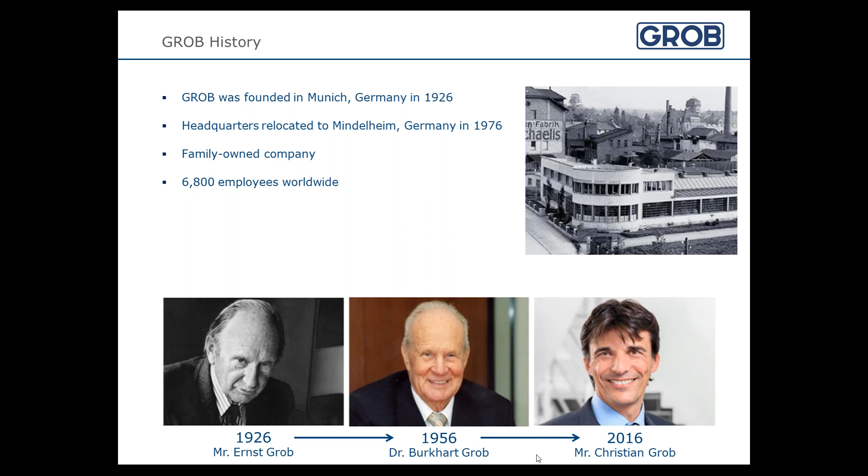Worldwide, as a company, we have 6,800 employees, and Mr. Christian GROB is now the leader of our company.

The GROB Group has 5 production plants and 15 sales and service plants, or branches. In North America, we have Bluffton, Ohio, where we are currently. We have our apprenticeship program here in our building. We have in all of the manufacturing plants everything from sales all the way through the end installation and service of the machines. Our company headquarters is in Mindelheim, Germany, that is in Bavaria, about an hour to the west of Munich.

We also have the second plant that was created in the GROB Group, Sao Paulo, Brazil. We currently also have a China Dalian plant and a plant in Italy, along with several worldwide sales and service offices. This is an overview of our company headquarters in Mindelheim, Germany.

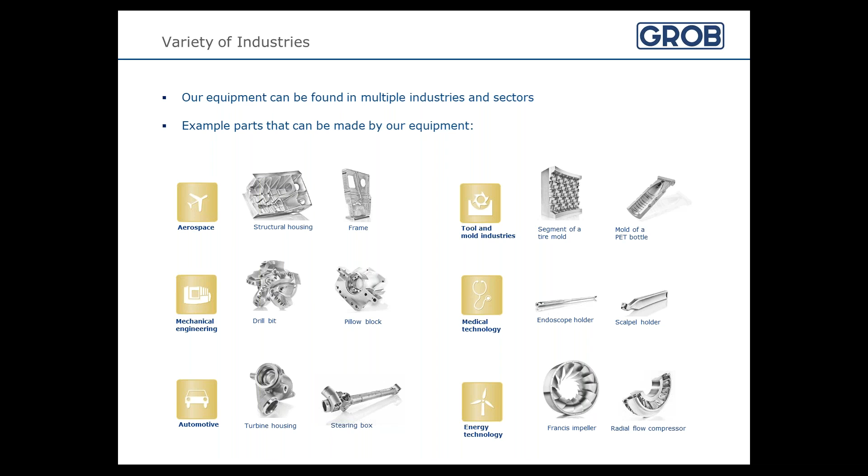So some of the cool things on this sheet, if you look under the medical technology section, we worked with and sell machines to a company out of Indiana that makes some very interesting medical tools. They also make replacement joints. So if you break a hip, we can cut you a new femur out of titanium on a GROB machine. A lot of things you wouldn't naturally think of.

It has 5-axis capacity, so it's able to make some very complicated cuts. It can orient the part in many fashions in which a normal machine would not be able to. A machine like that is going to be put in place at a customer site, and it's going to cut the same part every day, 24 hours a day, until it's completely worn out or they discontinue that product line.

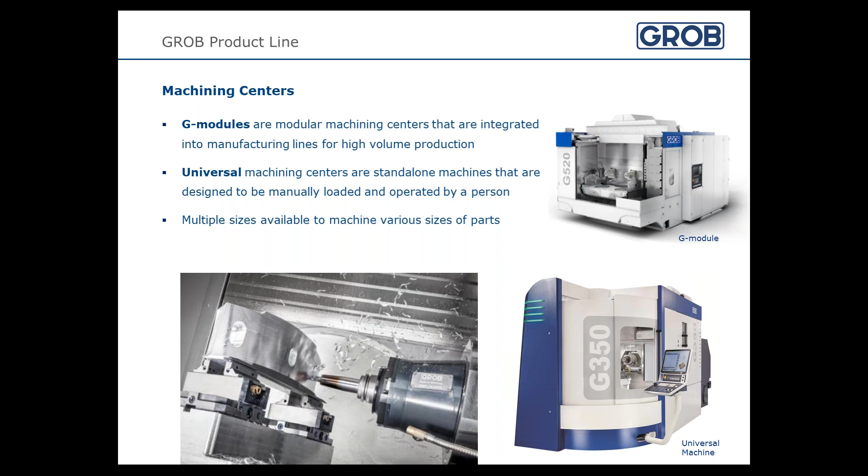That interacts with the spindle of the machine, so it has a very rapid tool change process. Then the motorized spindle is the part that actually clamps onto that tool, spins it sometimes up to 18,000 RPMs for certain materials, and is doing the work of cutting the part.

So the spindle is contained in the cross slide assembly, we would call it. It moves about 3 axes just in that position. The spindle comes in and out of its housing and then moves left to right on that axis. And then the last part is the tilting rotary table. This is where the part is affixed. That can spin about 2 rotary axes and then vertically on the y-axis.

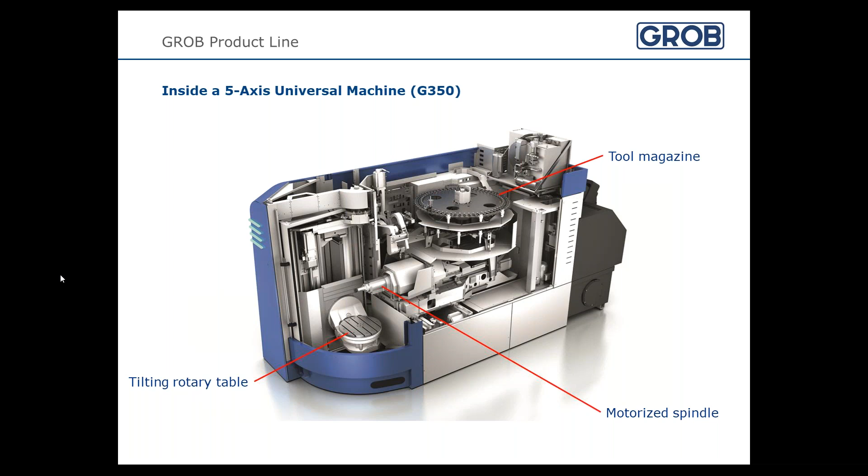There's some very cool videos on our GROB channel on YouTube that would give you a better grasp of how these machines operate. I would highly encourage you to look at that. We've tried to show that through the webinar, but the latency is a little slow. But if you have free time, I would strongly recommend that.

Some of the other items we can provide a customer with would be assembly systems. An assembly line is where we're going to take parts, combine them, put in cut plugs, bolts, run bolts down to certain torques. There's cells that have cameras that inspect parts, so the camera's able to go in, take images, and make sure it conforms to the specifications.

Sometimes these cells are very complicated, so there's a lot more engineering work and electrical startup and debug time in a system like this. For Tesla recently, we've put in some lines where we're looking at the electric motor, putting certain components of it together, taking images, verifying everything's been put together right. It moves on to the next station and has a variety of processes done to it there as well.

These jobs are very unique. Customers have wild desires that they want from us, so we have to come up with some very interesting concepts. It's really cool if you're ever able to take a tour here to see some of the assembly machines our engineers are able to dream up to fulfill our customers' needs.

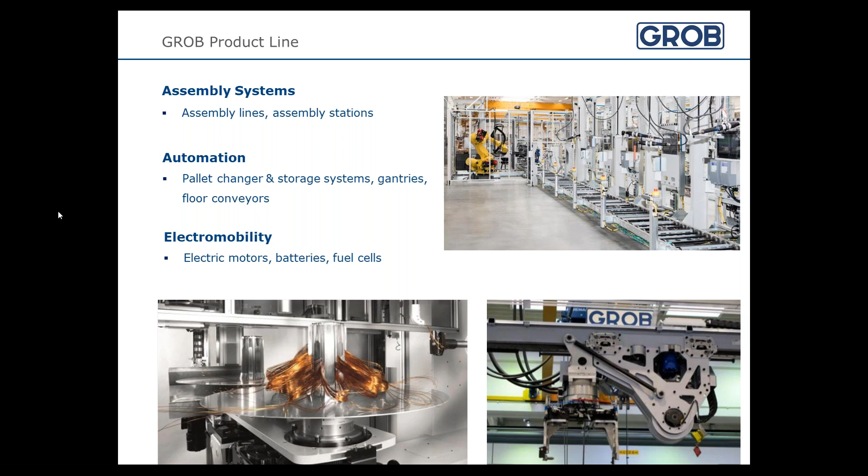We also make gantries and conveyor systems, which move the parts along through a system. And since buying the electric motor facility in Italy, we're now getting into stator winding machines, which is kind of exciting. It's a new technology, and I feel like it's a good push for keeping us relevant in the years to come.

Our sales department's going to crunch the numbers on what this would cost that company. It'll go through the full engineering process. Every single part, fastener, motor, drive, it's all considered. Then we begin to produce it here in-house.

We try to say we're vertically integrated, so almost everything that goes into a GROB machine is built here at GROB. Our machine shop makes all of the parts, our sub-assembly people put the parts together, our final assembly people verify that the machines work as they should, and then they go out and install it at the customer. Then, post-sales, we do training with our customers so they can adequately run their machinery, and we provide service to those machines.

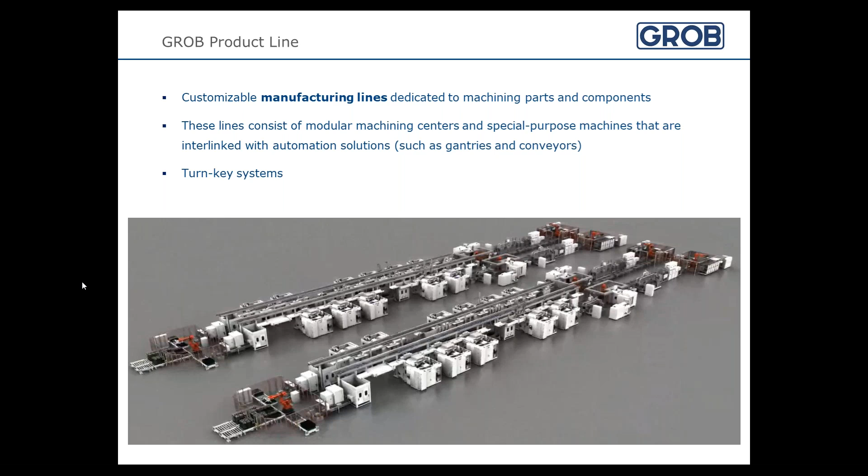Okay, so that sort of covers the company background and the product line here at GROB. We're going to switch gears and focus on our apprenticeship program. If you have any questions about any of the previous slides, don't hesitate to put that in the chat feature, and Evan can be on standby to answer your questions. But Mark's going to start out by talking about a couple of our other staff members included in the program, and then I'll take over from there.

Our training staff consists of the three of us that you have met, me, Mark, Evan, and Mackenzie. We also have another two staff members for the training. Mike Hawk is our mechanical training instructor. Mike joined us here at GROB in 1996 as a machinist. He worked his way up into being a supervisor in the machine shop, and in 2003 he was moved over into the apprenticeship, training apprentices since then.

He is an excellent machinist, and he gives very valuable insights into just how machines work and what people need to do and understand to do the job they need to do.

Dean Kales is the other member of our training group. Dean was an electrical controls engineer at Ford. He worked at Ford for 30 years and moved on from there, becoming an industry liaison with the College of Engineering at ONU, Ohio Northern University. He was there for a couple years, and then he came and joined us. He takes care of a lot of the coordination with Rhodes State and dealing with our students going down there to school. He works hand in hand with the administrator at Rhodes for our apprenticeship program, and daily deals with the apprentices on how their schoolwork's going and everything else like that.

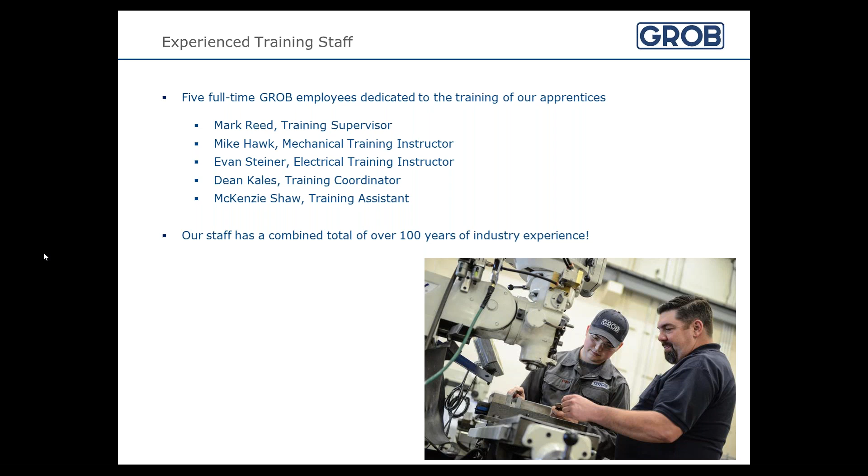One thing we like to point out is our staff as a whole has over 100 years combined of industry experience. I think it's going to be very hard to find that kind of experience in another company where the training group is able to put that experience behind what they're passing on to the kids in the apprenticeship program. It's a very valuable tool for us to use the mistakes we've made over our lives and the experiences we've had and things we've figured out, and be able to share that with younger employees just starting out, trying to keep them from having to learn things the hard way like we had to.

I think that alone goes to show how important this program is to our company. Apprenticeship programs have been a very vital part of the growth of our company. We hired apprentices from our original Munich plant in the 1920s, and now we have well-established apprenticeship programs at each of our production facilities worldwide.

So we're going to focus on the program here in Bluffton. Our common goal for the program is to grow our future workforce from within the company. Through an apprenticeship, we are able to train apprentices in the way that matches the growing needs of our customers and products. And investing in our employees early means we're giving them the right tools to be successful here at GROB, and also allows them to become the highly skilled technicians and employees that we need in every department.

Our program started here in 1990, and we have hired and trained over 380 apprentices. Right now, 40% of our total workforce is made up of past and current apprentices, and our apprentices can be found across multiple departments within our company, from the machine shop to the panel shop to final assembly to marketing to sales and proposals. Our apprentices are all over making an impact within the company.

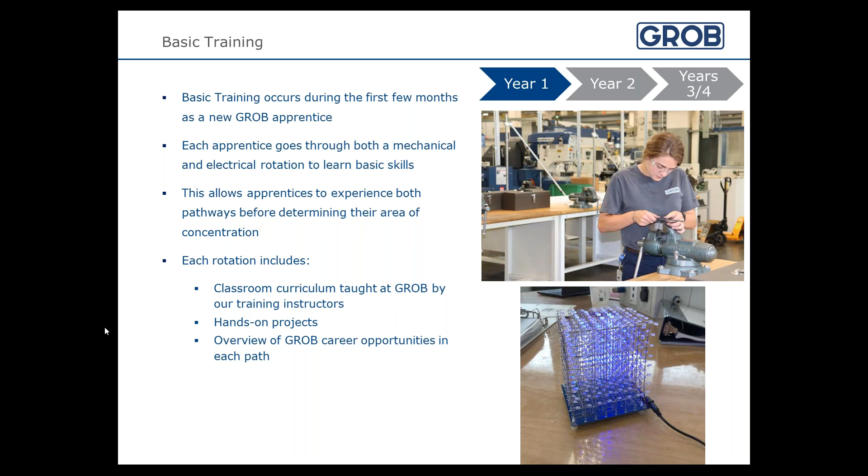Each rotation includes a variety of hands-on projects and some classroom curriculum that is taught at GROB by Mike and Evan. They also receive an overview of the various career opportunities here at GROB should they follow either path. Our instructors and supervisor do a really good job of taking the apprentices on a deep dive tour of GROB and showing them all the departments they could end up working in, should they choose mechanical or electrical. They describe each path, and that really helps the apprentices determine their ideal pathway here.

So after the apprentices have decided mechanical or electrical, they will spend the rest of their first year in our apprenticeship area further developing those technical skills in either the mechanical or electrical labs. This is a combination of classroom learning and a variety of hands-on projects led by our training instructors.

After their first year and the start of year 2, they will begin rotating through various mechanical and electrical departments in our facility. They're going to learn the skills needed to be successful in each of those departments, discover what areas interest them the most, and also have an opportunity to learn from and work alongside experienced employees on the plant floor.

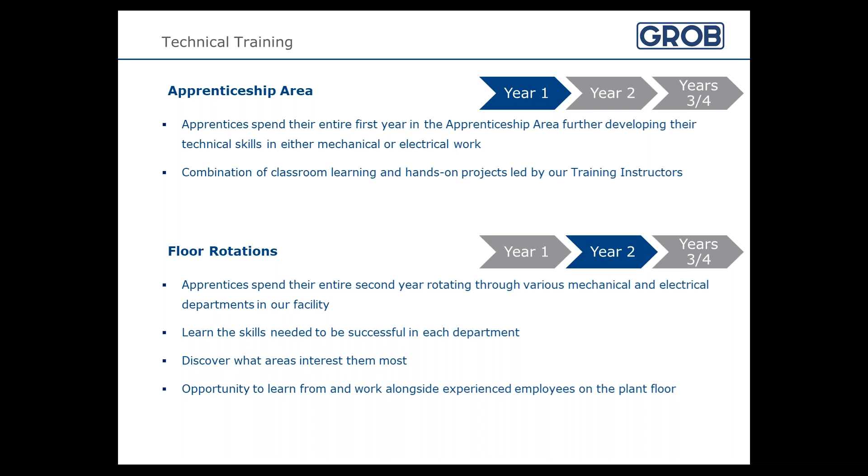It takes about 2.5 years for the apprentices to complete their associate's degree at Rhodes. So sometime in that 3rd year, they will receive their degree, and the rest of their time is spent in a specialized training route. Apprentices will be placed into our regular workforce in a specific department to continue their training. Their schooling will be done, and they're going to be working 5 days per week in their new department. Placement in those departments is based on their interest, their performance since they're constantly being evaluated during those rotations in year 2, and also just based on company need at the time.

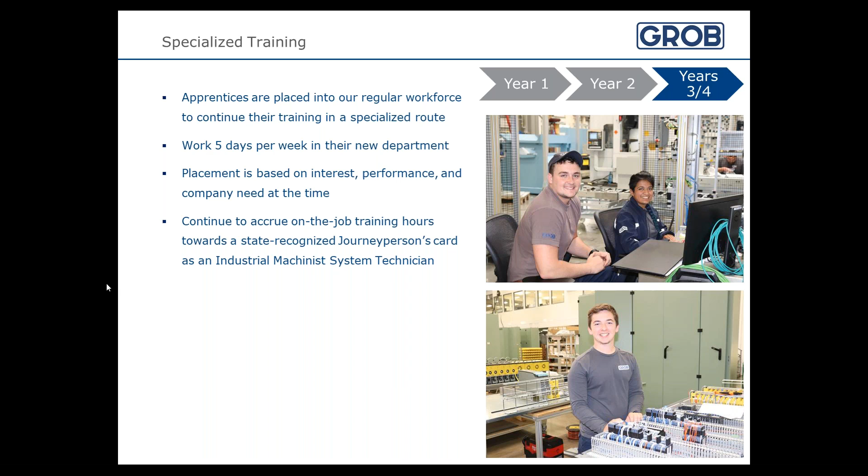They will also continue to accrue on-the-job training hours, and this is important because the apprentices will also receive a state-recognized Journeyperson's card as an industrial machinist system technician. So they'll get the Journeyperson's card along with the associate's degree through the program.

As an apprentice, they are considered full-time employees, so they have access to our full-time benefits. This includes an opportunity to start saving for their retirement. We have a 401k company match of 3%, up to 6%.

Our company also finds work-to-life balance very important. Our apprentices will be working first shift, Monday through Friday, 7 to 3:30, and they also get paid time and a half if they work overtime.

We do have one department that is on second shift, which is our machine shop. So if an apprentice is interested and is placed in the machine shop in year 3, there's a possibility that they would be going to second shift. However, the majority of our departments here at GROB are on the first shift schedule.

We also receive 12 paid holidays, vacation, and sick days. The company also provides 100% company paid health insurance premiums, which is a very big deal. So we have medical, vision, and dental coverage, and those premium costs are not coming out of our paychecks every 2 weeks. Of course, the company paid associate's degree, and all required tools are provided by the company.

Uniforms are provided each year. The company also reimburses up to $160 towards new work shoes each calendar year.

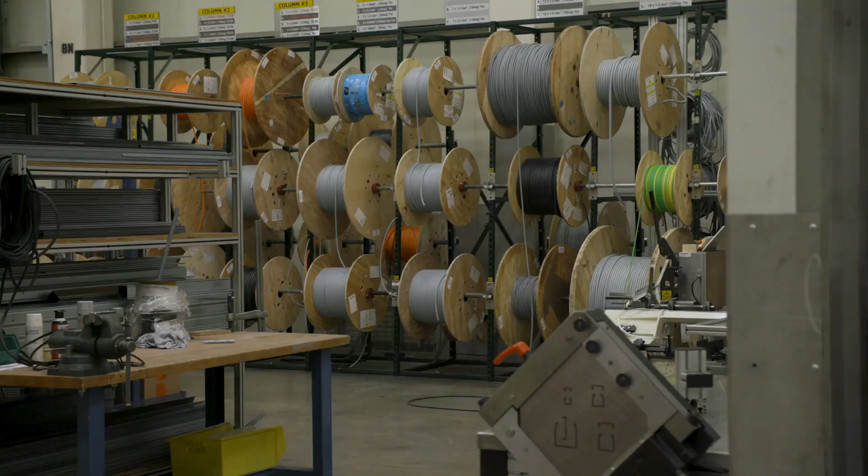We're now working our way into the electrical area. This is where we have multiple cords and various electrical components, and those will all get sent out on carts down on the floor to be used on the machines as well.

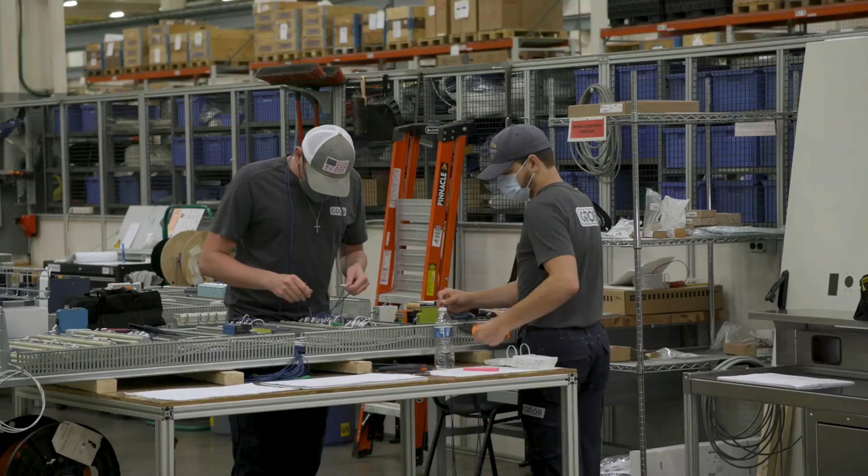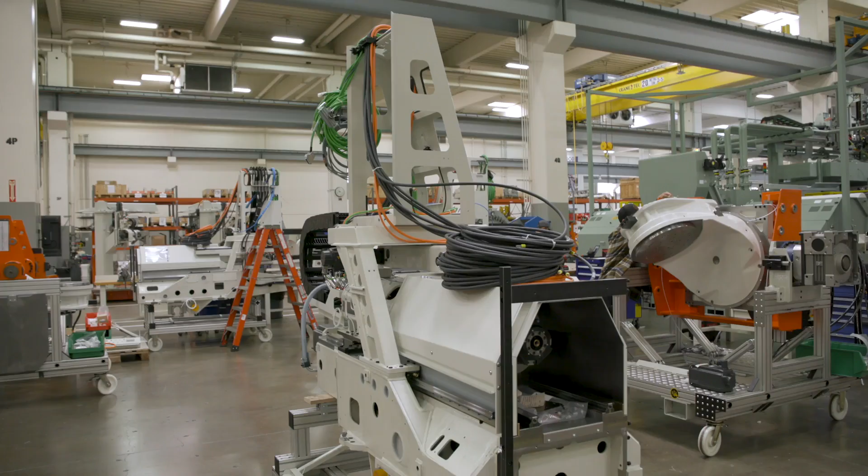Over here is our panel shop. This is where we do all the wiring for our machines. We'll start with a blank slate, put in all the hardware, and then route all the wires. Behind me here, we've got tool changers, tool magazines, spindles, and machine tables, and those are all sub-assemblies built and ready to be put in machines.

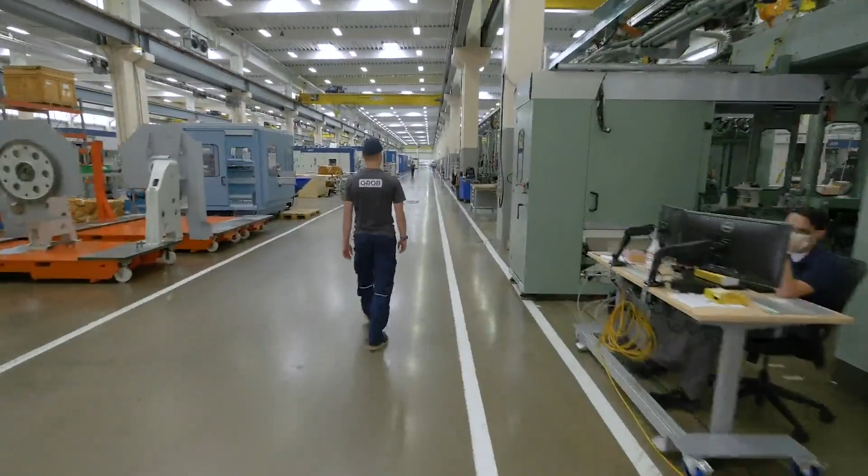Right here is one of our machining lines. You'll load a raw piece of material in here, and an overhead gantry will take it from machine to machine, starting at one process and finishing at the end. This line will get shipped out along with employees and be set up in a factory for the customer.

Behind me, we've got our standalone machine bases. This is just a good look at the frame of the structure, before we have our electrical components and hydraulics.

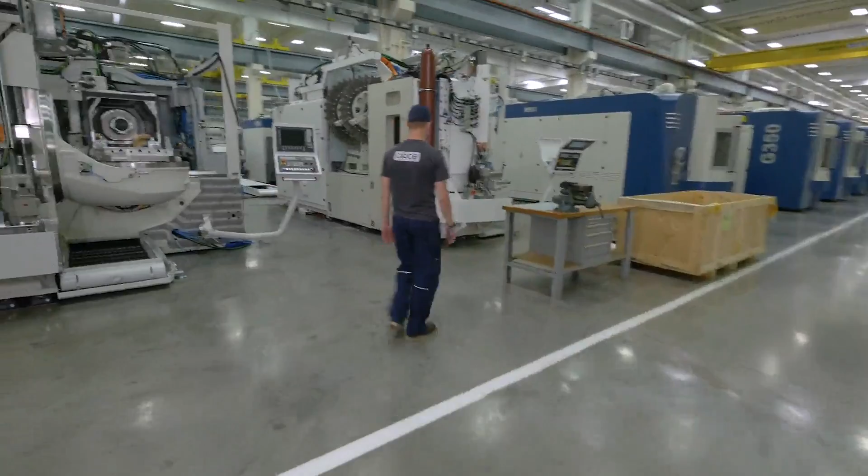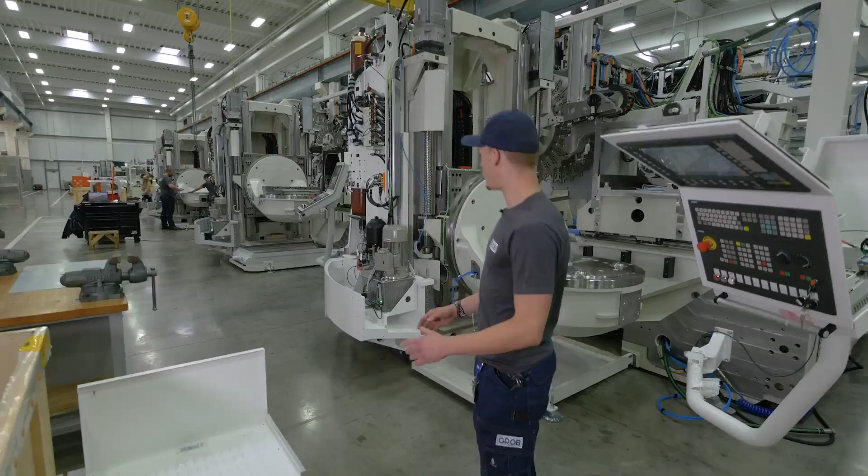Here you can see all the components put together on the base of the machine. We've got the spindle, the table, and the tool magazine up above. This is a good look at the inside of a machine, all the wiring and plumbing that's been done.

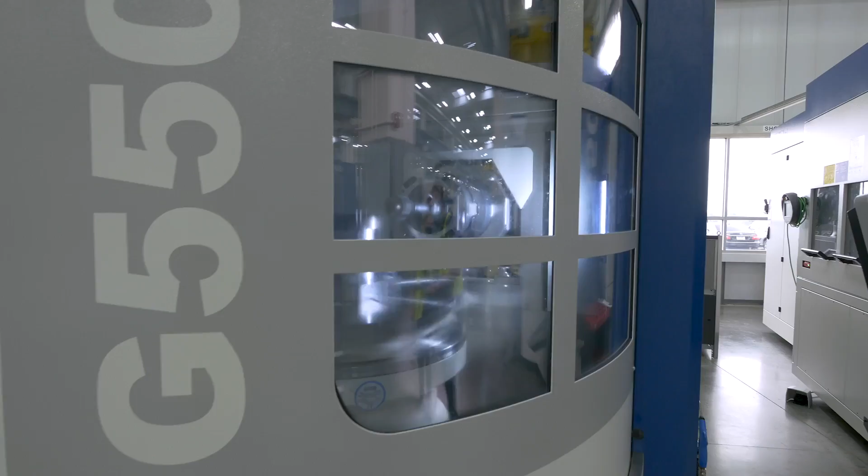This is our showroom. This is where we keep all of our standalone machines for customers to come in, take a look, and really see how they work. Here you can see this is just a dry cycle of the machine running, so it's not actually cutting anything, but it's a good demonstration of how they work.

Over here is our showroom. This is where we showcase some of the products that we've made on our machines. Here is a pretty famous one, the basketball net.

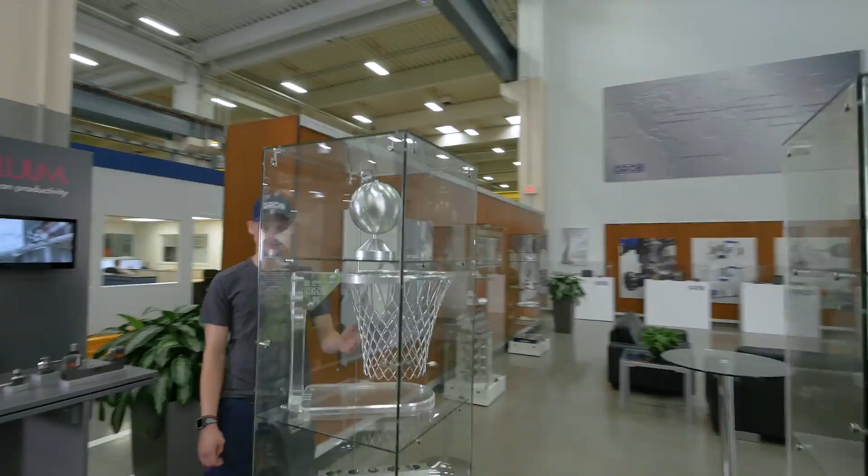That video can be found on YouTube. That was cut on a G350 out of a solid piece of aluminum, and then it was milled down and programmed to have all the little weaves and wires in the net there.

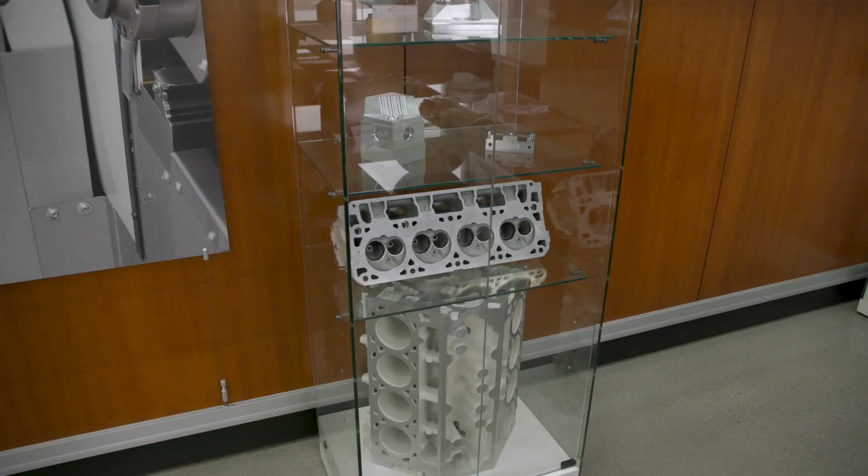Along with that, we've got things like engine blocks and engine heads, transmission parts, and behind me here we've got electric motor parts. So our machines are very versatile and can do many tasks.

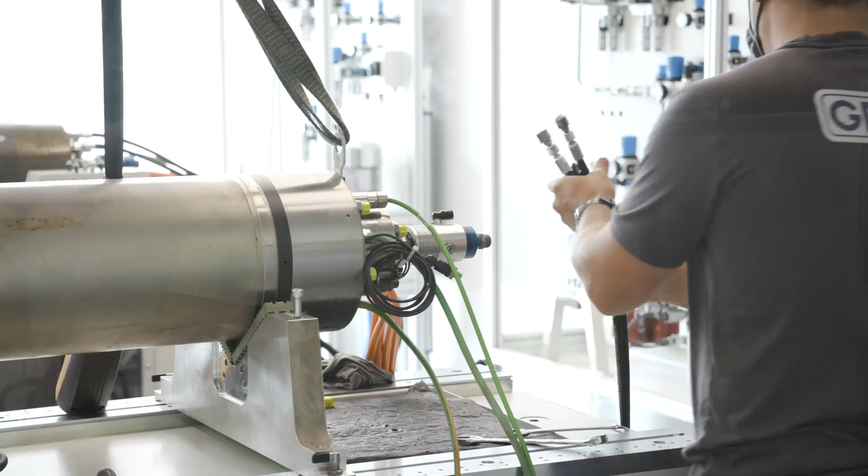Behind me here is the spindle room. This room is very critical that it's kept clean and dry. The spindle is a very important part of the machine, and that's where they go to get assembled and tested.

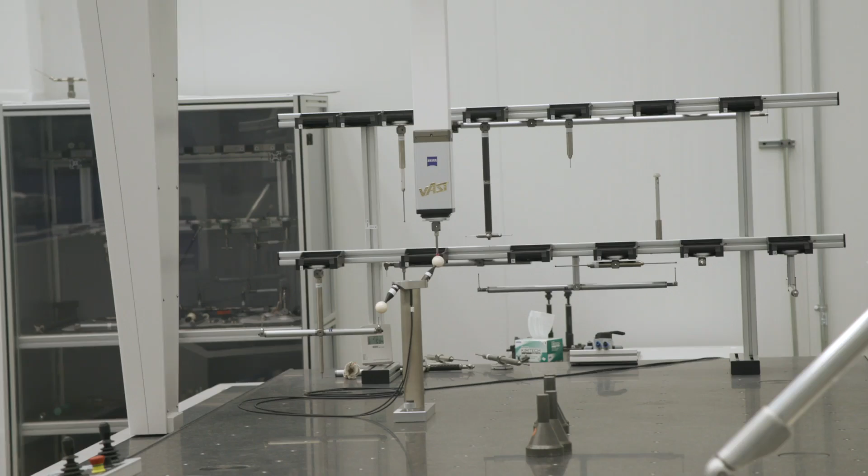Here we're taking a look at our quality control room. This room is actually pressurized to keep dirt and moisture out. That way we don't have any issues when it comes to measuring our critical parts.

That was a brief tour of our facility. Now we'll take a closer look in the apprenticeship area and see what goes on.

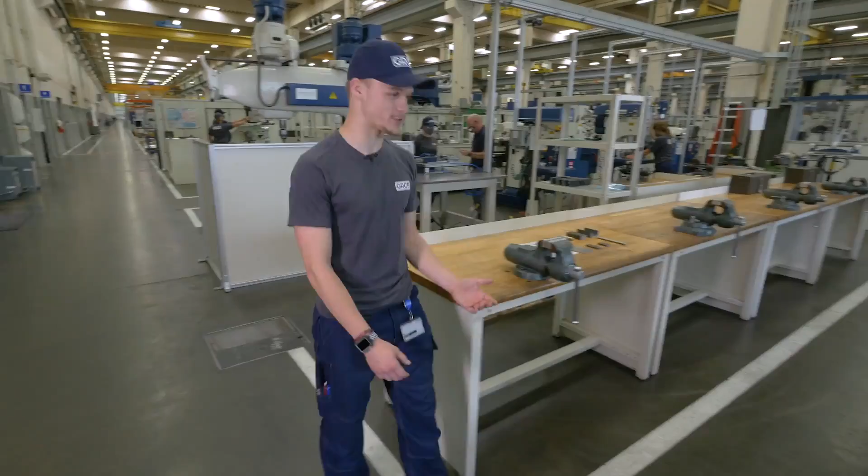So we'll start here at the drill press. Here you can see Sammy's countersinking some holes, and that's a crucial part for making bolt alignments right and assembling things. This here is an entry-level CNC machine.

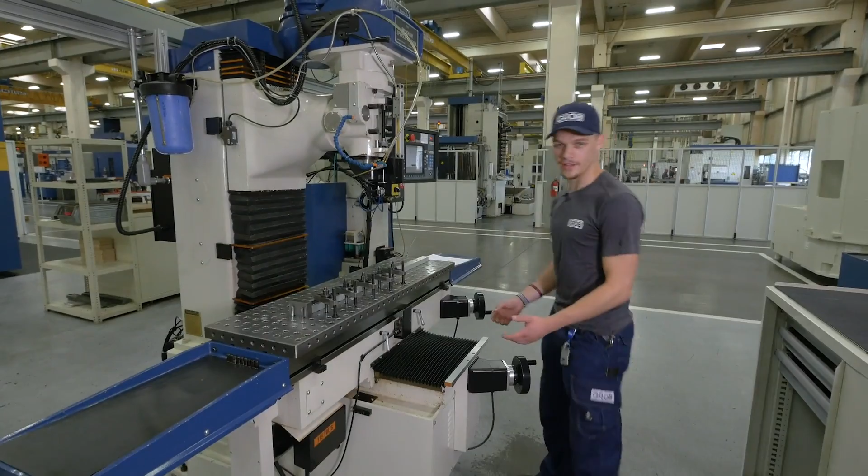It's only 3-axis, and it's used to help you learn programming without jumping right into a bigger mill.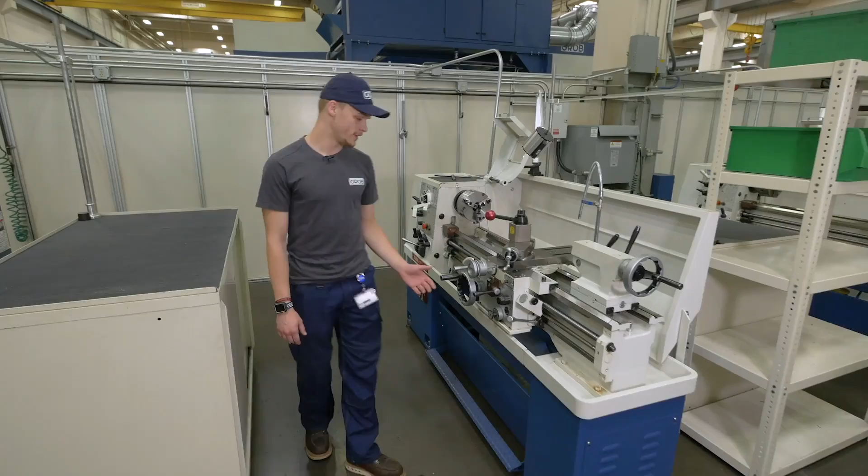What we're looking at here is a manual lathe. This is one of the first projects that you'll learn after you progress from the filing project. This just teaches you the basics of how a lathe works, how it moves, and how to measure parts and make them precise. Now we're going to go talk to some of the other apprentices and see what they're up to.

Hi, I am Joey Carver. I am a second-year apprentice here at GROB, and I'll be showing you some of the benchwork projects and some of the manual mill projects that we do here in the apprenticeship area.

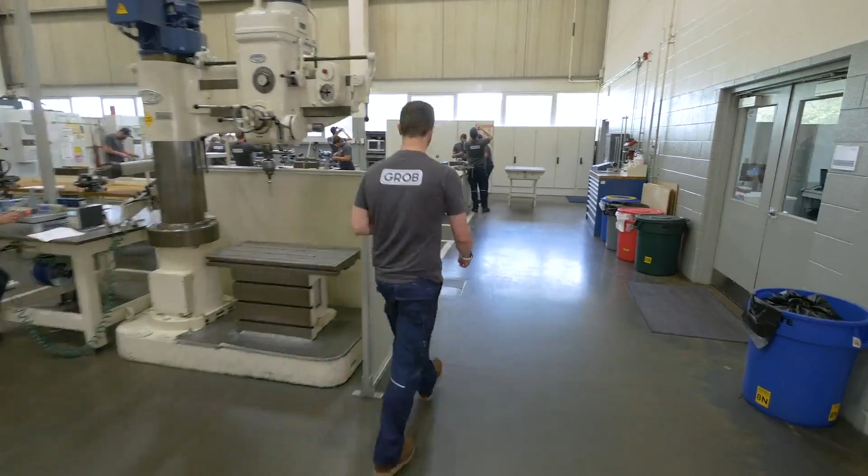So this is our benchwork area. We each have a certain station with toolboxes. We'll be doing various projects from filing to hand drilling.

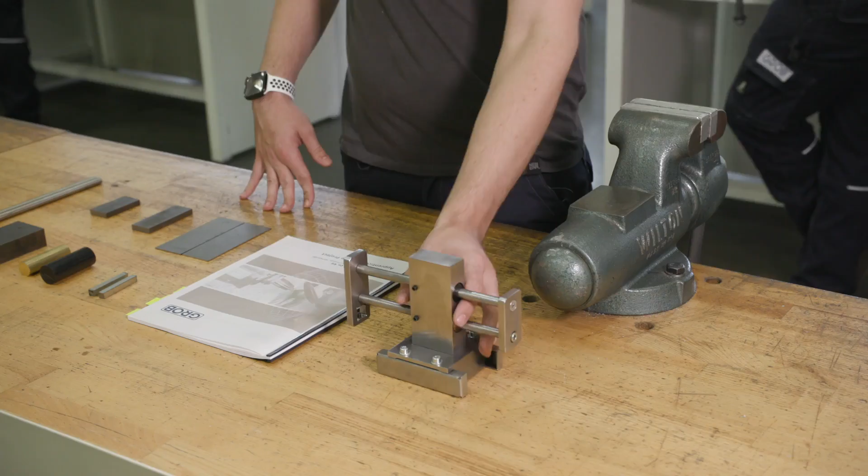One of the projects here is our slide project. This is the finished product of what it looks like. So right here is our raw stock material.

We're able to take this material and use our skills at the benchwork, our manual mill, our manual lathe, and the drill press to eventually end up and turn out the final project.

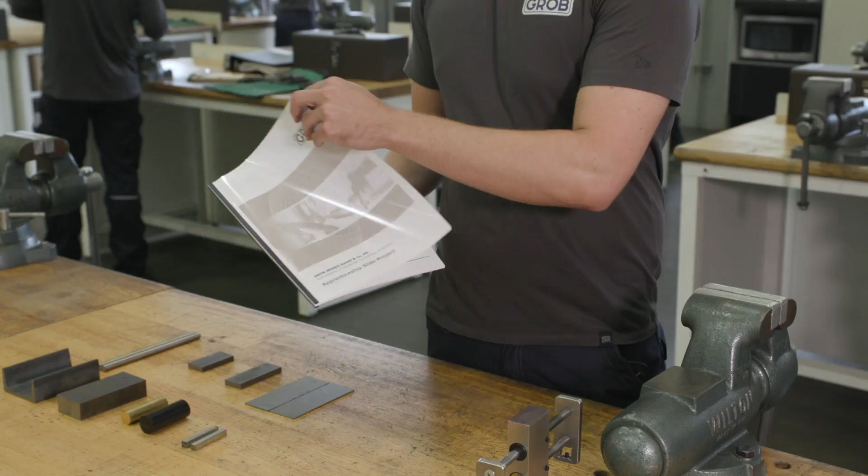During this, we are given a booklet with all of our prints and our quality control checks in it. First we have our overall blueprint which just shows you how to put it together and where parts go. Next is our individual blueprints where we have to follow specifications and tolerances of where we will machine to.

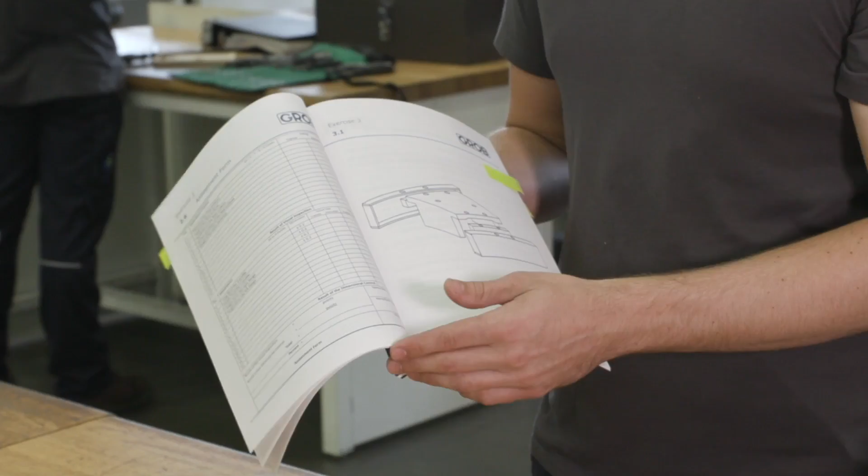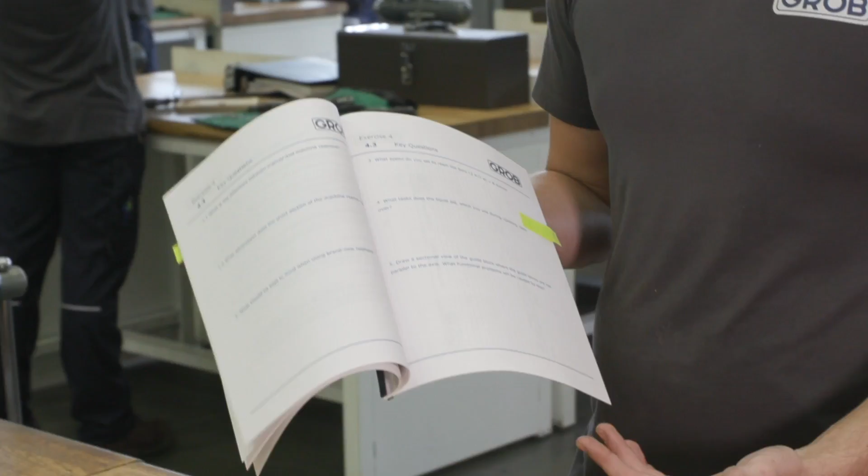Next, at the end of when we finish machining, we have a quality control check where we have to measure certain parts of it, where they have to be in certain tolerances. Also, during this entire project, we have to answer key questions pertaining to the project to help us understand what we're doing. That's mostly what we do around here in our benchwork area.

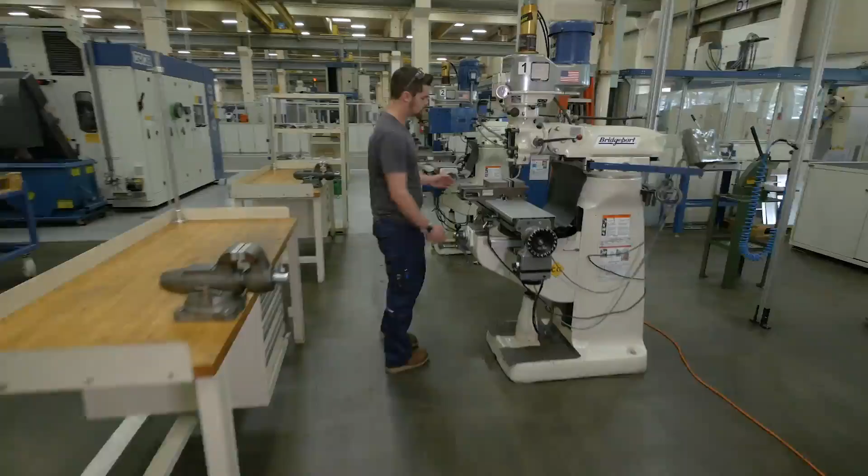So these two machines right here are manual mill machines. They take many different types of cutters, end mills, drills, reamers up in here, and we clamp down our work.

It's able to make any of our parts that we saw over in the slide project. After each part, we have to take it out and measure it to certain tolerances, and then have our supervisors check it. That is a basic overview of what we do around in the benchwork in our manual mill.

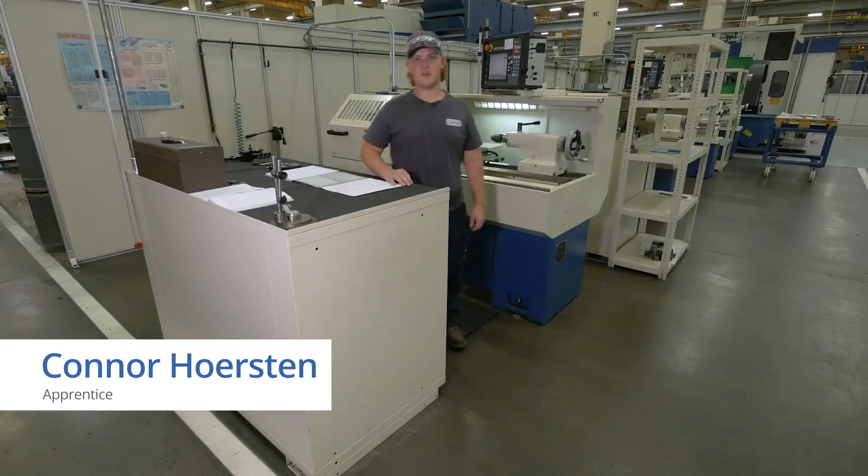Hello, my name is Connor Hoersten, and today I'm going to show you the CNC lathe. This lathe uses conversational programming, and when running this lathe, we learn how to program our tool paths and set our tools. This machine is the G350.

This is a 5-axis machine made by GROB. When we use this machine in the training area, we learn how to program using basic G-code manually. We also learn how to set up our tools and find our offsets.

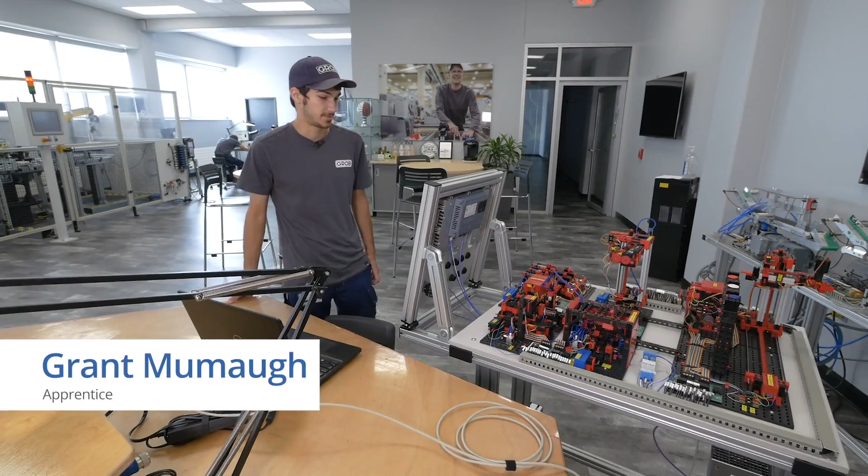So hi there, my name is Grant. I'm a second-year apprentice here at GROB Systems. We're up here in the electrical lab today. This is where if you go the mechanical or electrical route as an apprentice, you'll come through up here and start working on projects that are more focused towards the electrical path.

Right here, we have our factory simulation. This is going to take parts from our fake storage area over here, and it's going to move them through various processes until we get to the end. And that looks a little something like this.

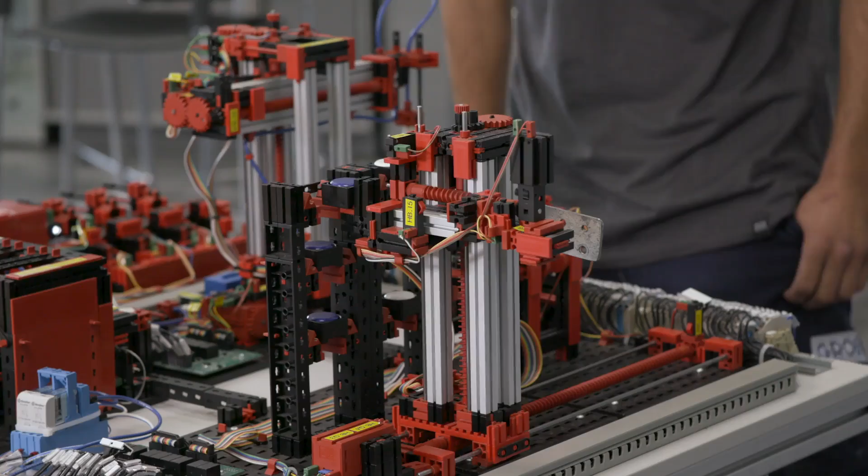All of this was programmed by second-year apprentices. We didn't have any outside help aside from our instructor, who answered various questions that we had.

So every process that we just saw came as a blank slate at first, and then we programmed it on the computer here. We have it hooked up to various devices underneath the table. Once we go through, we spend roughly 2 to 3 weeks programming all of these various components, such as the motors, some lights, as well as some air tubes for what was picking up the parts.

And we program that all together into one big file until the end result becomes something like this. There's always complexity that can be added to it, but this is the main feature that should be able to be done, and it can be done repeatably and very well at the same time.

So if you want, we're going to move over here to this cell now. And this is our Fanuc robot arm.

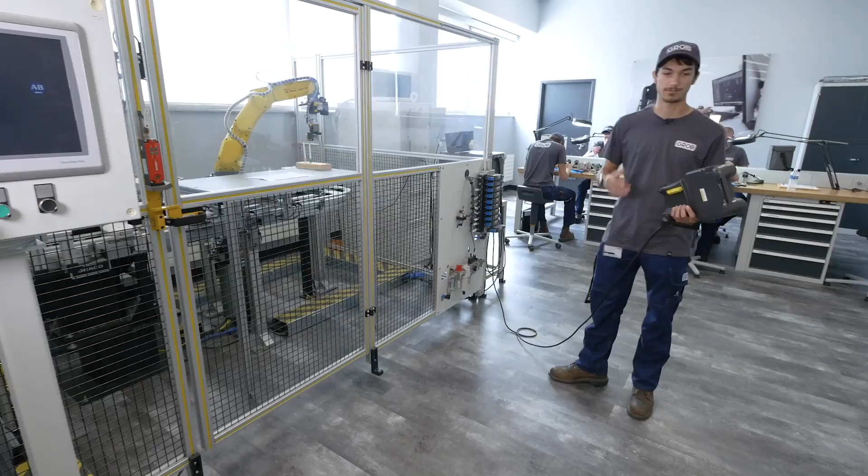You can use this in a variety of ways. Out on the actual floor, we have customers that will request specific robots that can do specific things. Here, what it does is it normally picks things up and takes them around this big track, but we've shortened things down to give more of a basic demonstration.

And everything can be controlled via this panel here. So if I want to, I can jog to the left and the right. I can go up and down, and I can go in and out.

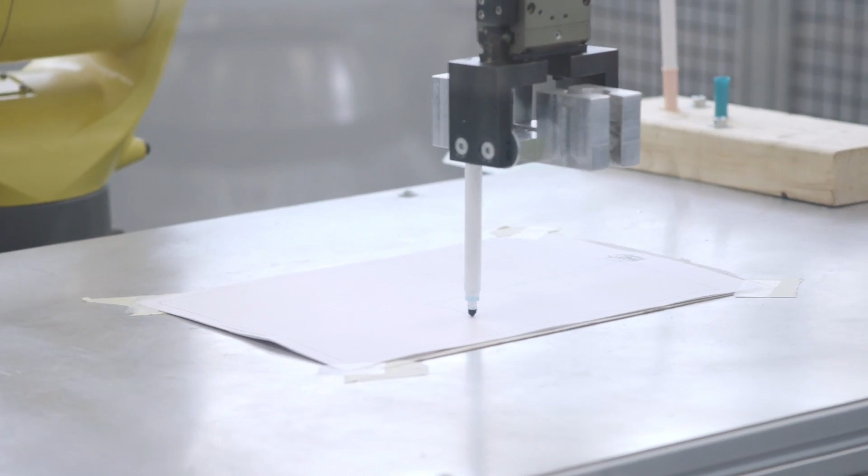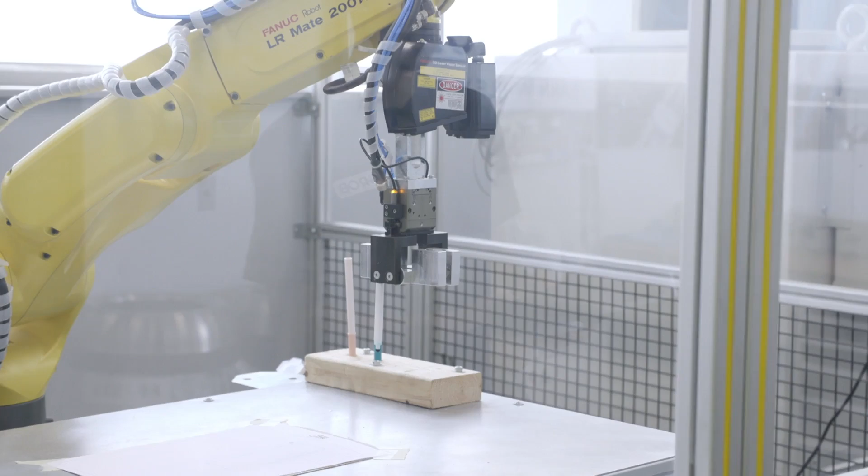Again, all of this is programmed by apprentices here at GROB. This came to us as a blank slate, and then we took in all of the resources that we learned over the years being built up from our supervisors, and we transfer it to what we do out on the floor eventually, which starts here as just basic training exercises.

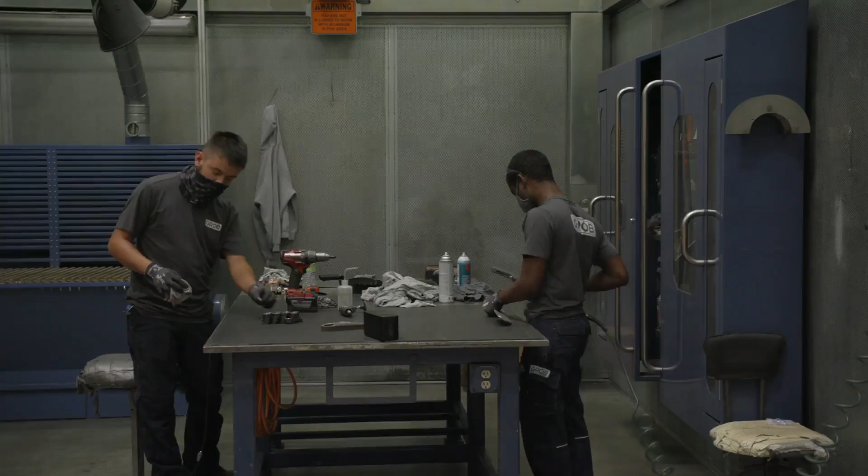All of this, from the programming to the wiring itself to the screws down to every last single nut and bolt, is done by the apprentices up here in this lab. And as we transition out onto the floor, a lot of these skills are going to be kept with us, and we're going to use them every day in our workplace areas.